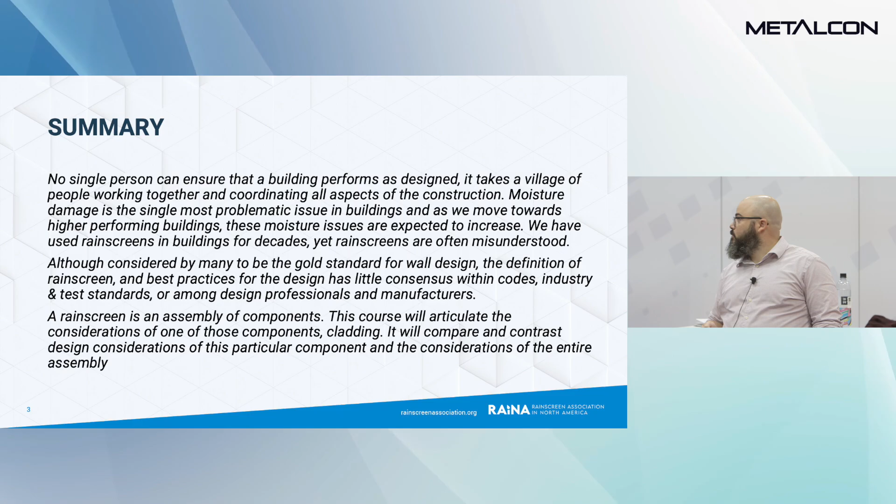So today we're going to talk about cladding and Rainscreen. Really what we're going to talk about is the source of the misnomer of people looking at a cladding system and saying, that's Rainscreen, or maybe looking at the wrong cladding system and saying that's Rainscreen. We're going to parse out between what's cladding, what's Rainscreen, and how they work together. So we're going to start with water management of walls - basic wall science, the types of walls, types of cladding, and then cladding integrated into Rainscreens, and then I'll give you my pitch on the Rainscreen Association.

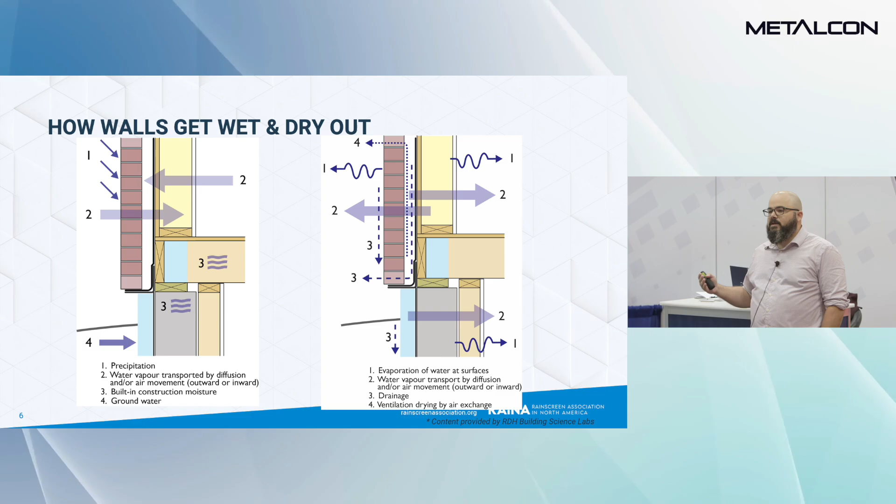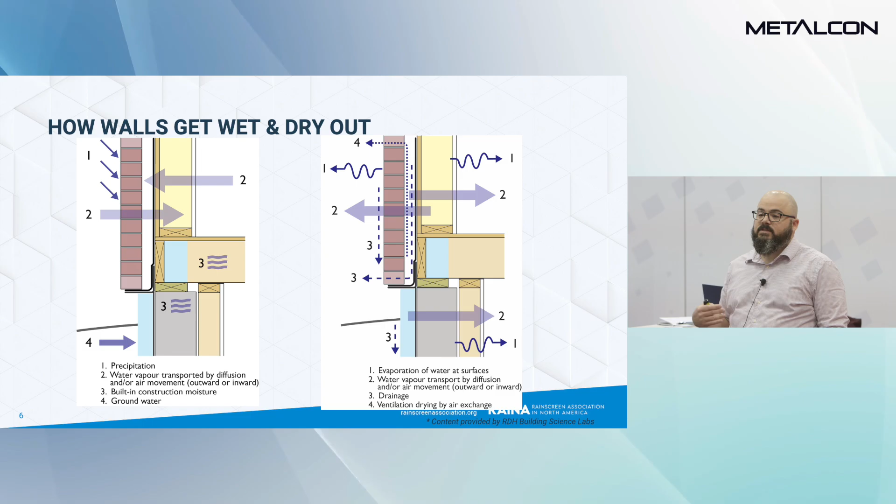So to start with, it starts with water, right? Walls are about protecting the inhabitants from the exterior, and there's a bunch of different ways that water gets into walls. If you have either designed your wall to take water, or maybe you've designed your wall not to take water and water gets inside, then you have to know how that water is going to get out of your wall system.

And what happens when you don't control the water in your wall system? You get problems, right? You might get leaks, obviously, and that can cause damage in a number of different ways. You see on that top picture, maybe that's freeze-thaw damage - I really don't know what it is, but you've seen freeze-thaw damage on things like stone and brick and other products.

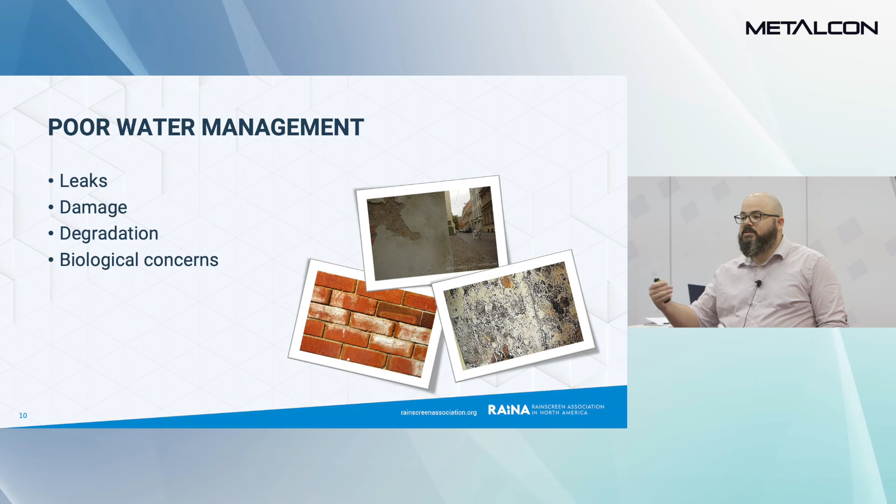And then you see the efflorescence on the brick on the lower left-hand side. That's when water goes into the wall system, maybe it doesn't have its route out and has to come back out through the brick. It carries with it the salts in the brick and deposits that on the face before it evaporates, right? And then hopefully not mold, right? Those are your biological concerns when you're starting to mismanage water.

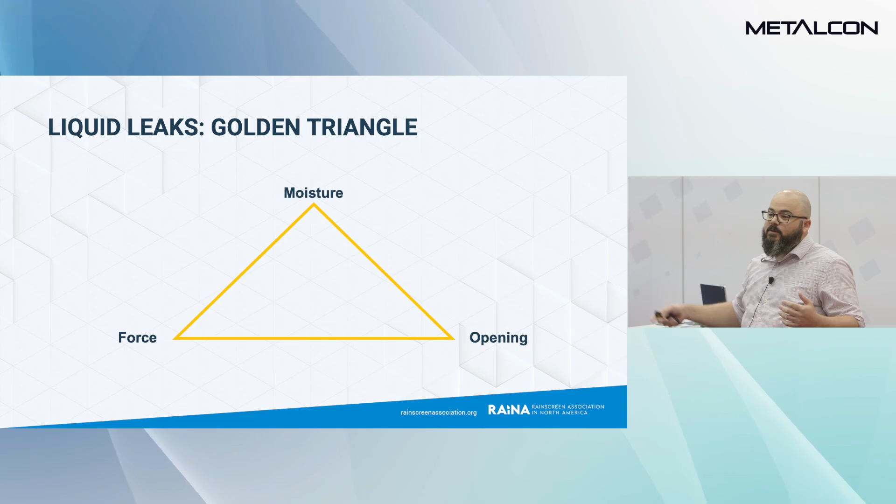So when it comes to liquid water, what does it take to get a leak? This is the golden triangle - this is what I've lived by for 20 years. If you have liquid water, which is moisture, an opening, and a force, all in the same place, you're going to get a leak. That's as simple as that, right? So if you can divorce any of those three, you avoid leaks. Great. Easy enough.

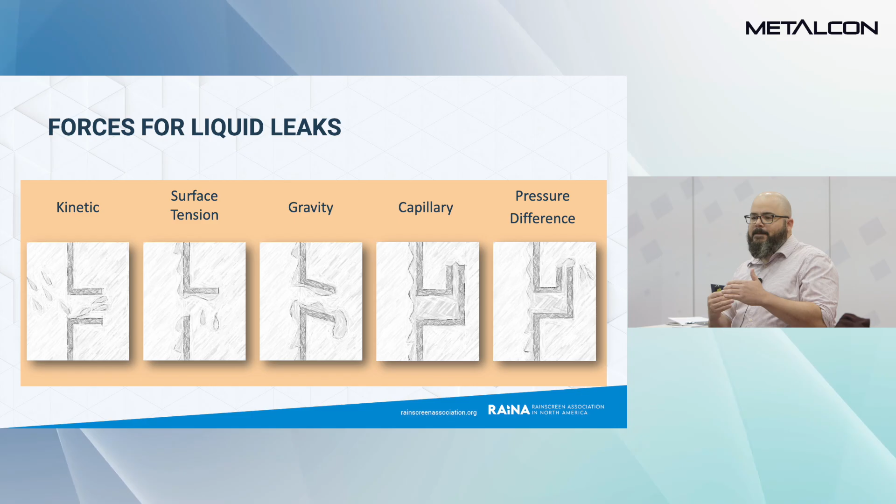The forces that create leaks are numerous. It's not just wind driving rain into your wall system—that's the kinetic force. You could also get surface tension forces where water sticks to a panel system that was damaged or misfabricated and goes somewhere it shouldn't. Gravity obviously pulls water to the lowest potential energy, whether that's your basement or a gutter. Capillary action lets water travel down or up through small spaces via surface tension. And pressure differentials, once water bridges a gap, will move that water one way or the other.

When you're designing walls, there are traditionally three major categories of water management strategies. Traditionally, and still in other parts of the world, you see a lot of mass walls—concrete, stone, brick, full-width walls. We call those storage walls because they can take up to 500 times more water than a stud wall system before they create a leak problem.

Traditionally, if you're in a temperate area like Europe building with a stone wall system, you're getting pretty quick wetting and drying cycles, and as long as those balance out, you're not getting water coming into your inhabited area.

Then you have the exclusion strategy, which is what we've done in cladding since the 50s and before. This is where you put all of your water barrier or water control layer on the outside of the building—sealed metal panels, stucco, EIFS, maybe even sealed concrete. You have to have a perfect barrier there to get perfect performance.

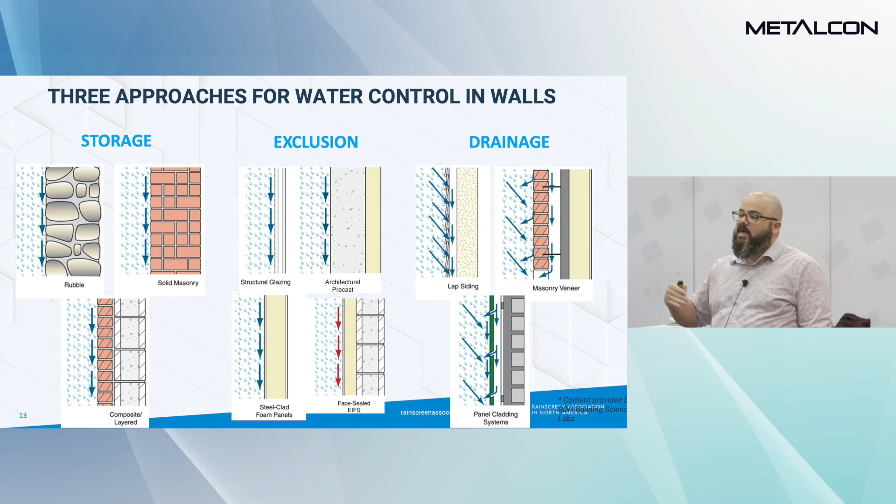Finally, what we're here mostly to talk about today are drainage walls. That's where Rainscreen fits in, but there's a much larger category called drainage walls, where you put a multi-layered wall system in. You're saying water can get through the first layer, so we take that load off our water control layer, which we tuck behind that first layer—that way we avoid leaks. Even if we have water problems we didn't anticipate on the front side, we're taking the load off the water control layer underneath it.

We used to have, even when I started, mostly just building paper and something in front of it. Obviously that's not working anymore. We want to make each part of the wall system the highest performance we can in terms of a functional wall system.

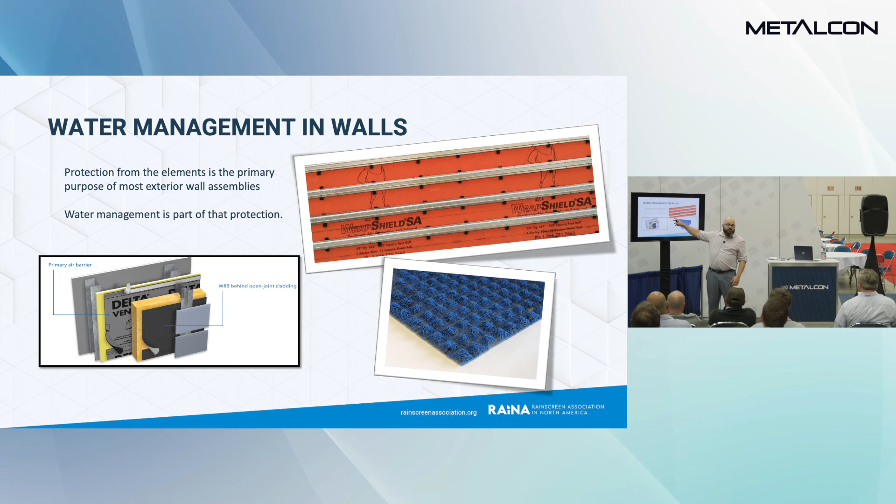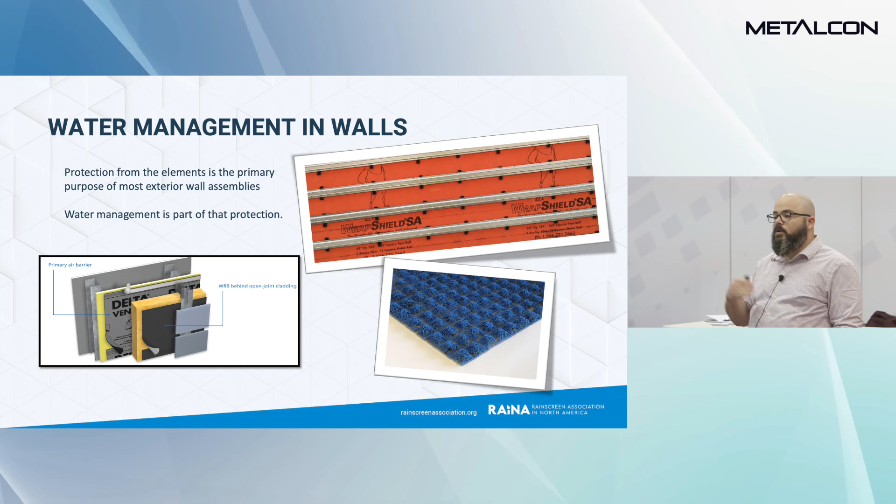So you're seeing these different water management products out there now—membrane products happening at multiple layers too. Against your sheathing you might get an air barrier and a water barrier, and then you might just have a water barrier that's not an air barrier in front of that, depending on how you're designing your wall system. You also have these dimple sheets to control and direct your water once it gets back into the wall system.

So we're thinking about different layers now. We go from that mass wall system, to exclusion where you could have one layer or multiple layers but are really keeping water on the outside, to the different layers of a drained wall system. What we have here is an example of that drained wall system and its different layers.

We're here to talk about exterior cladding. Behind that, you're creating an exterior cavity with an attachment system or some other way of furring that out. Then you have the exterior insulation underneath that, usually on top of your water-resistive barrier. Depending on where you are in the country, you may or may not be using exterior insulation still, but I guarantee you it's coming for you soon.

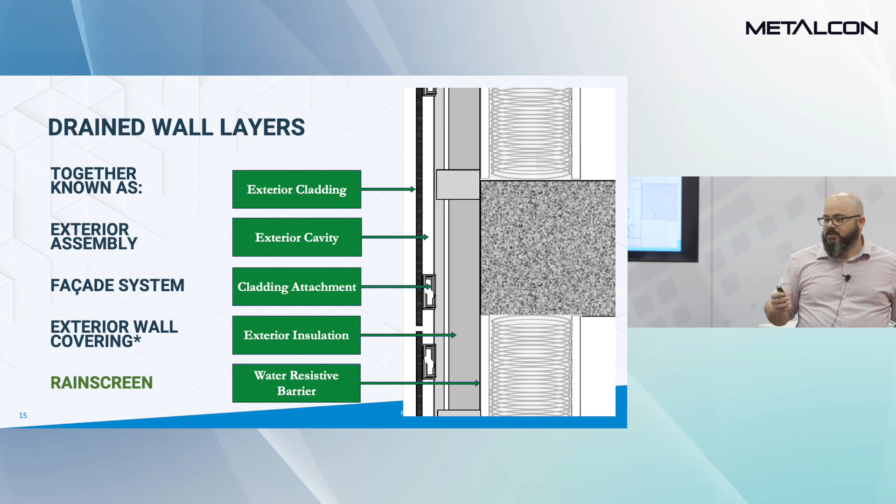So let's talk about that first layer—cladding. What makes cladding cladding? Merriam-Webster says cladding is something that covers or overlays, which is a pretty good definition—it sort of covers what we're talking about, but it's not good enough for us. So the Rainscreen Association did some research, going to about 10 or 20 different sources that talked about cladding the exterior.

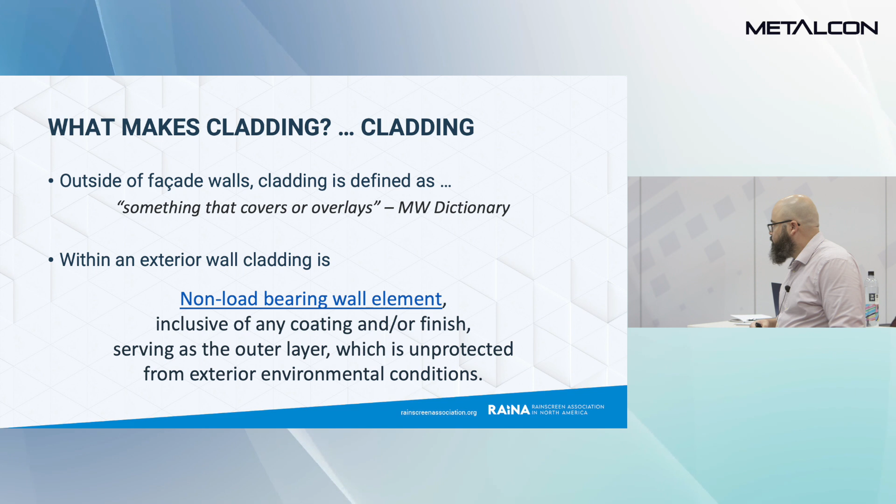They came up with a definition for cladding that covers what we're talking about today: a non-load-bearing wall element, inclusive of any coating or finish, serving as the outer layer, which is unprotected from exterior environmental conditions. That really covers most of what we call cladding in wall systems today. You see that non-load-bearing wall element is highlighted in blue.

That means that we have a definition for that too, because we started this definition saying we wanted to define cladding. Non-load-bearing is an essential part of these types of components, because as you get into code and compliance, the difference between load-bearing and non-load-bearing means a lot in terms of performance that you probably don't need on a cladding system. So what we found was that non-load-bearing is actually not a term that's been well defined.

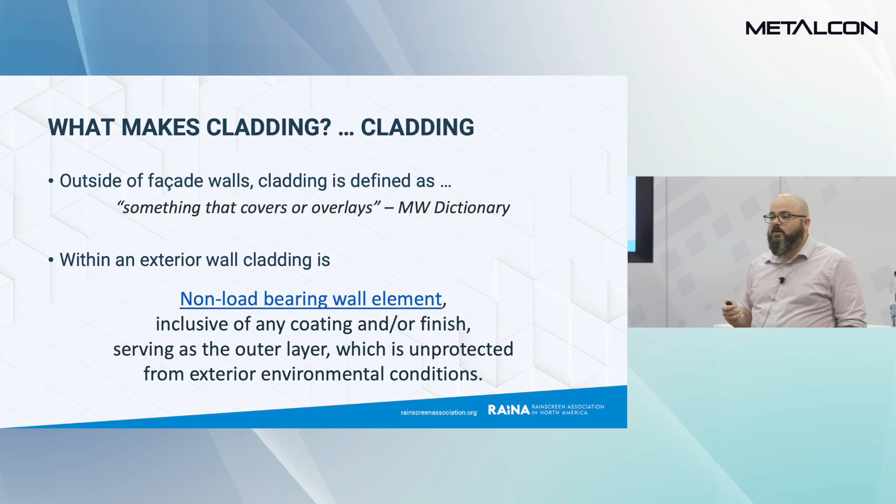It's not in the code. You have something that's called load-bearing in the code, but you don't have non-load-bearing. So we felt we had to define that as the Rainscreen Association, and we came up with this definition: it's a material or system that transfers load to the structure, does not contribute to the overall structural performance of the wall, and resists its own weight as well as loads imposed by surface-mounted accessories that are allowed by design.

That's non-load-bearing. I think it's probably the first definition you've seen of non-load-bearing. Whether or not you geek out on this stuff, I'm guessing I might be one of the few people here, but it's one of the only definitions out there for non-load-bearing, and it gives us an important distinction in those areas for compliance.

If you were at the presentation yesterday from Andrew Ashton, he was representing RAiNA also. He was the chair of the definitions committee, and they took months to come up with this with building scientists and representatives from AIA and the rest of the industry.

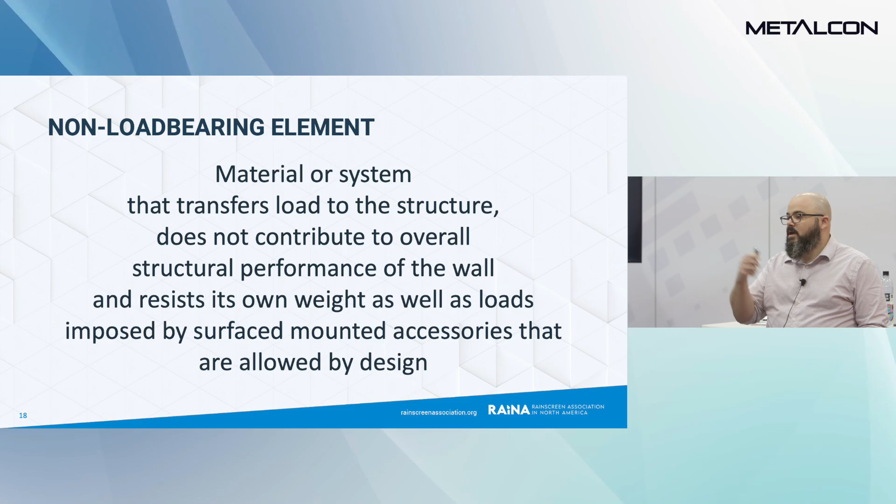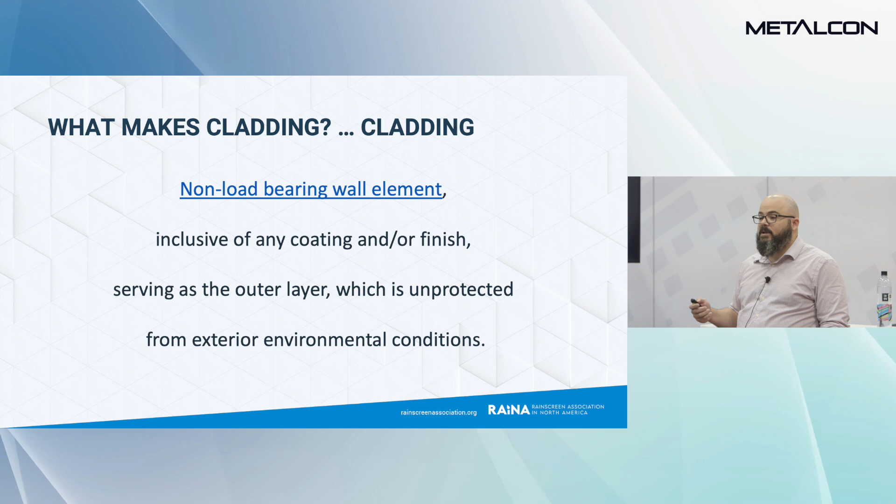So again, cladding is a non-load-bearing wall element inclusive of any coating or finish, serving as the outer layer, which is unprotected from exterior environmental conditions. Now we're going to revisit those wall systems with that in mind.

So you have a brick wall system, which, if you have a multi-wythe brick wall system, you're probably using that as your load-bearing wall. Right off the bat, that doesn't really qualify as cladding. It is your outer surface of your wall system, but it needs to do different things than cladding needs to do. So that's obviously your protective layer, but not considered cladding.

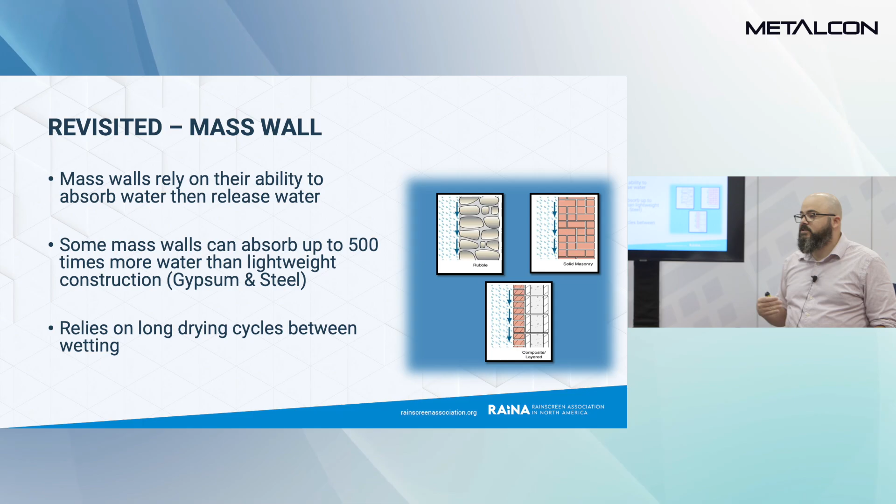You might have brick that is considered cladding, and we'll get into that after this. Actually, if you have a multi-layered system, a thin brick veneer on a concrete wall system, you still have that mass wall system, but now you have a brick cladding. That cladding doesn't necessarily need to have a standoff or ventilation behind it. You have that cladding component, non-load bearing, there for a different purpose.

For your barrier walls, now we're all familiar with sealed metal systems. So sealed panel systems are my typical reference for barrier walls. You have your panel layer, and then you have wet seals in the joints. And in that situation, you have cladding on most of these walls. You have a backup wall, and then you have cladding.

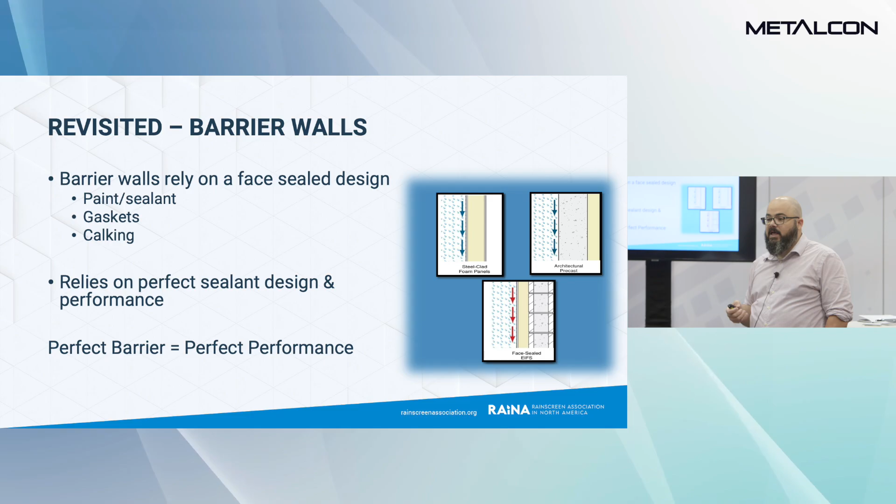Again, it's not necessarily a Rainscreen. It doesn't meet what we're going to talk about later on, but it's cladding. And it has its own requirements, probably very similar to cladding that is part of Rainscreen.

And then you have your drainage walls. Cladding in drainage walls starts to take on a bit of a different form. You're often using very similar materials in very similar ways, but then you get to introduce new materials because you have this drainage space that gives that outer wall some balance, where you couldn't use some materials in the same way you'd use a metal panel. Now you can start to use different materials.

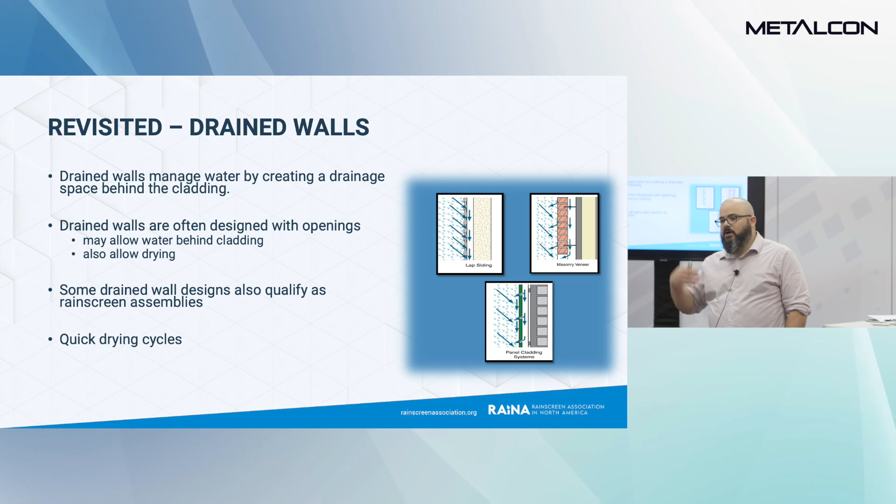Now, the types of cladding that are out there, I've just listed some up here, but you see a lot of metal. We're going to go through just about all of these in the next 15 minutes or so.

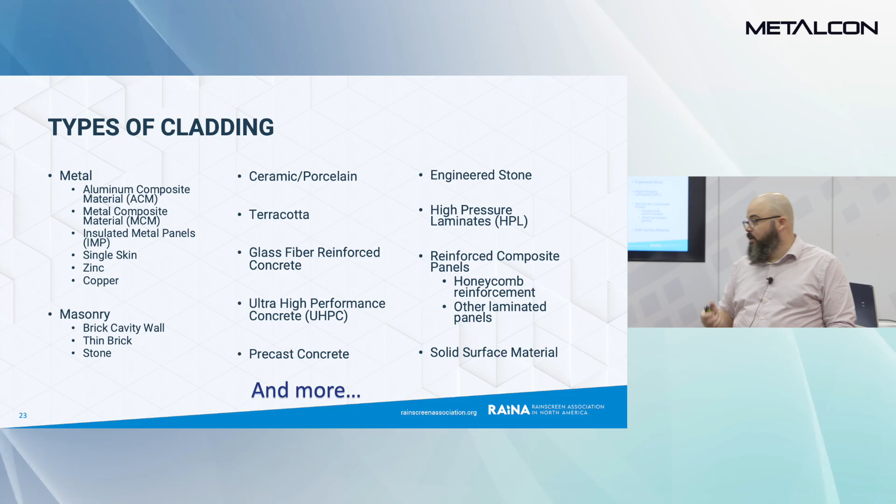But what's important here is that cladding isn't specific to a material. We can make just about any material into a cladding material, and it can be used in different ways, but you have to pay attention to the material properties. So we're going to start with metal.

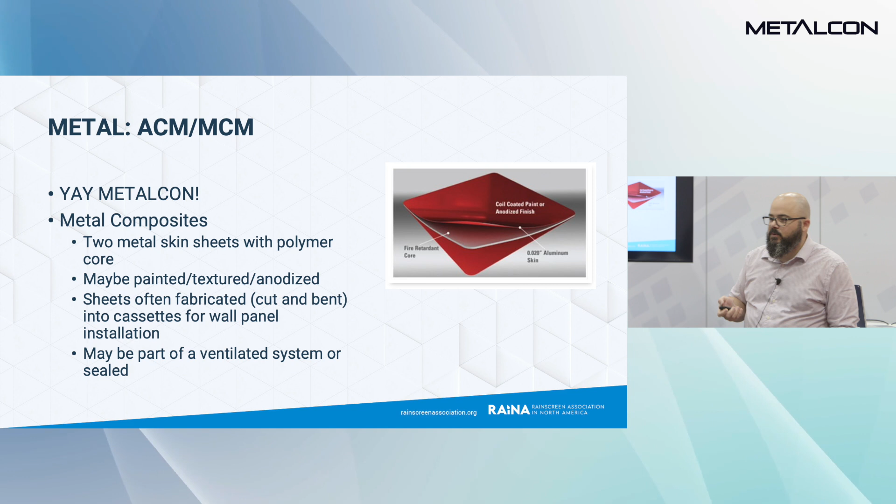Yay, MetalCon! ACM, MCM, I'm assuming this is what most of you guys are dealing with. This is a metal skin product that has some sort of polymer core, usually FR, and we fabricate it into cassettes. I've seen metal ACM used the same way that other, let's say, more rigid claddings are used, where you don't fabricate it into cassettes, but for the most part, you're doing a cassette system, fit into each other, with either dry or wet joints.

From an aesthetic standpoint, this is what you're getting with ACM. Obviously, we're seeing a lot more—if you've been to AIA in the past couple of years, you see incredible geometric designs happening with ACM systems. I don't know how often you guys are doing those in your own shop, but they're pretty impressive for showpieces.

Then you get into single skin metal. With ACM, you have that polymer core, so you don't necessarily have a non-combustible product, and then you have compliance considerations that you have to consider on top of that.

With single skin metal, that's just whatever type of metal you're dealing with, maybe painted or sealed, being fabricated into cassettes or just panels attached, maybe even in exposed fastening systems. The benefit of single skin is that it's often fairly easy to fabricate, and it's non-combustible.

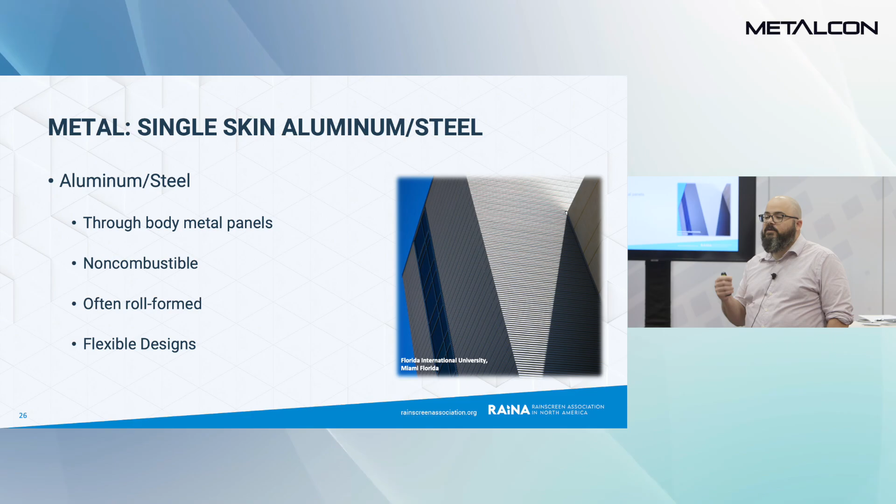Where I live in New York City, they just passed very restrictive building code language that limits combustible products pretty severely. Single skin products are one of the few products that fit nicely into the new code.

Then you get into other metals - you have zinc, copper. I've heard of titanium, never seen a titanium product, but heard of it. You're pretty much treating those similar to single skin, except they might have their own needs in terms of design and fabrication.

Sticking with metal, you have your insulated metal products. These are insulation that's skinned over on both sides by either steel or aluminum, and that insulation is most typically foam, but can also be mineral wool.

What's interesting about insulated metal panels is that they're intended to be insulating. So with the other metal panels, you can seal them or might not seal them, but you're typically sealing the insulated metal panels to get that insulation value.

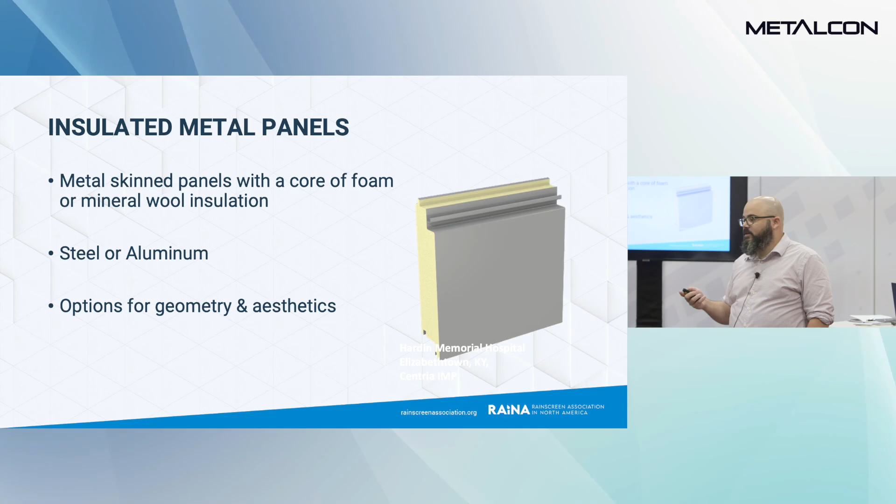However, I've seen a couple projects where they're using one of the other characteristics of these panels in a ventilated facade, which is an interesting choice from my perspective, but is happening out there. One of those benefits is the long spans you can get - you can put up 20-foot panels and keep them pretty rigid with insulated metal panels.

How many of you deal with insulated metal panels? Okay, good.

Now we're getting out of the metal side of stuff. If you want to leave, feel free, I won't be offended. You start to get into things like traditional masonry, so you have those brick systems - brick as a traditional load-bearing wall system, and then brick as a cladding material.

We're talking about brick as a cladding material, and this is a single width brick. Traditionally, you're putting on a lintel and stacking it up, but these days we're doing all sorts of different things with brick. You've even seen thin brick systems that go up like a panel - put on a metal piece and then put up like a panel on a wall system.

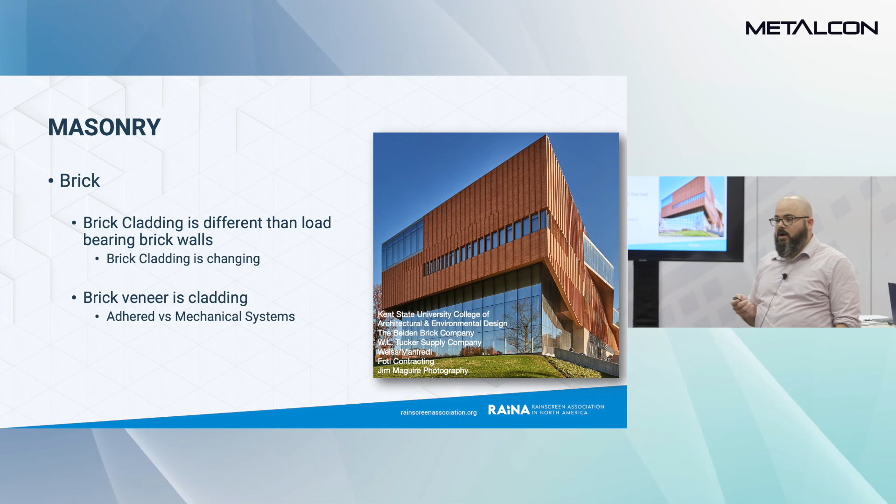One of the benefits of brick, again, it's non-combustible, so you get that benefit again in New York. Brick is one of those few products that we can easily fit into the new code.

Stone cladding is the same thing. We're seeing tremendous changes in stone cladding. One of the products that I helped introduce into the market bordered the masonry side of the business.

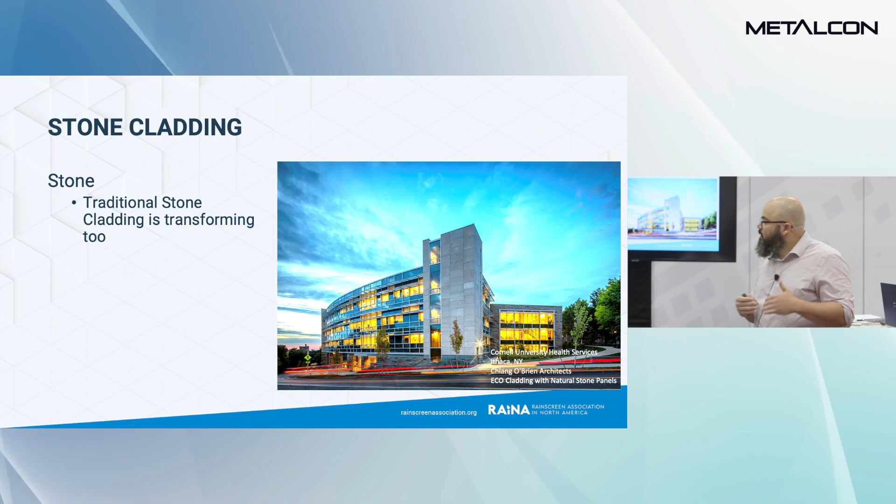When I was doing that, the masons were essentially focused on stone and brick and those sort of products. They wouldn't touch anything else. They operated different than panel installers - they were familiar with the traditional way of stacking stone up and attaching it to the wall that way. Not exactly like brick, but a similar mindset to a brick wall system.

Today, you're seeing all sorts of ways that stone's going up. You could put stone up in exactly the same way you're putting metal up, just using some different fasteners and doing a little bit of different site testing. But we're seeing all sorts of ways that natural stone is being used, very similar to any other cladding material, and again, non-combustible. Then you have your ceramics and porcelains, which are exploding onto the scene.

Traditionally, if you were going to build with ceramics, you'd have very small ceramic pieces with plunge cuts in the side, and you would stack them up. You might put them on a traditional rainscreen system where it's standing off the wall, but you would still stack them on top of each other.

Now we're seeing 5-foot by 10-foot porcelain panels in thin gauges, highly engineered, highly designed to go up like you would other panel systems.

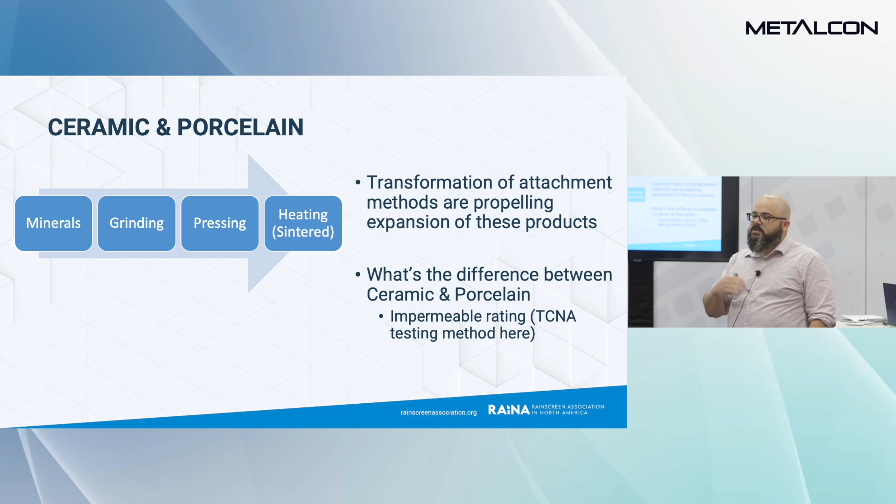The difference here is most of the products - if you have a CNC that you're cutting metal on, you might be able to cut something like the two, we're going to talk about fiber cement and HPL on those. As you get into these masonry products and porcelain, you're talking about a totally different setup and wet cutting. The companies that bridge those gaps are few and far between, but that's growing as these segments grow.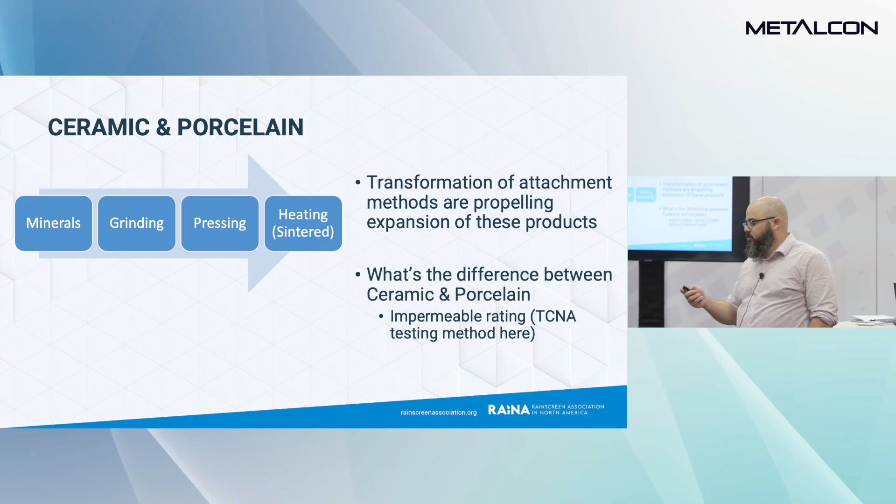Porcelain aesthetics give you very flat panels, larger panels, typically natural tones. But the technology with porcelain is increasing, and you can even get custom printed images on porcelain panels.

Then you have terracotta. How many of you actually install or deal with other products besides metal on wall systems? Okay, a few of you.

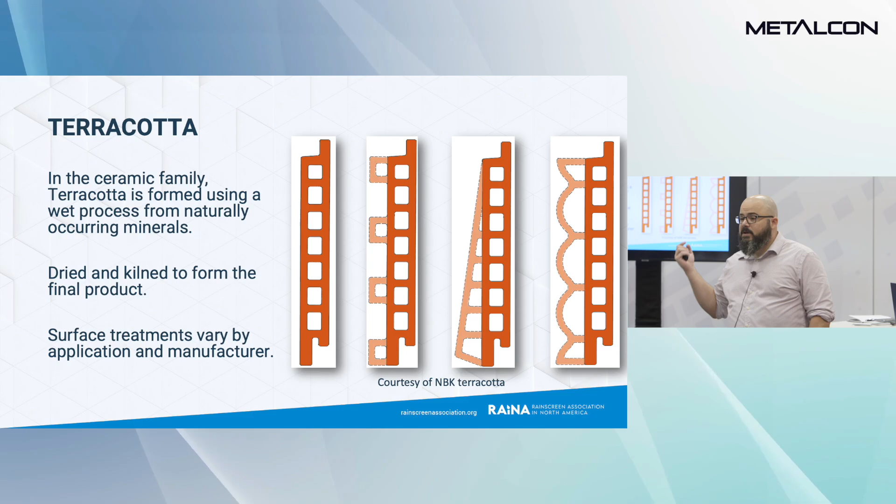Terracotta is obviously thousands of years old, and we're still making it - not in the same way, but in similar ways. It's a traditional building material you see on the oldest buildings in New York City and around the country, and now we're putting them in highly engineered rainscreen systems. Often you're seeing terracotta in standard heights, extruded. It's a wet process, sort of fits into the ceramic family, but has different qualities than ceramic.

With terracotta, you get a lot of flexibility, but you're often limited to whatever that extrusion die is. From an aesthetic standpoint, you see those standard heights. The architects are typically happy to design with those, not having to think about where all the joints lay - those are controlled for them.

Then you have fiber cement. Fiber cement is a cementitious product - we're going to get into a few of these. Fiber cement is water, sand, cement, fiber, and air. Those fibers can be organic fibers, cellulose fibers, or glass fibers, whatever - they help hold the material together. And then they're either air cured or autoclave cured.

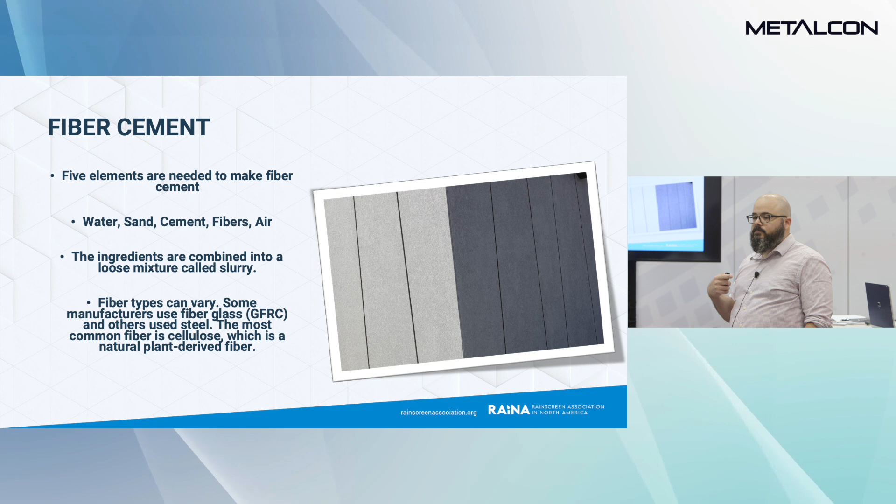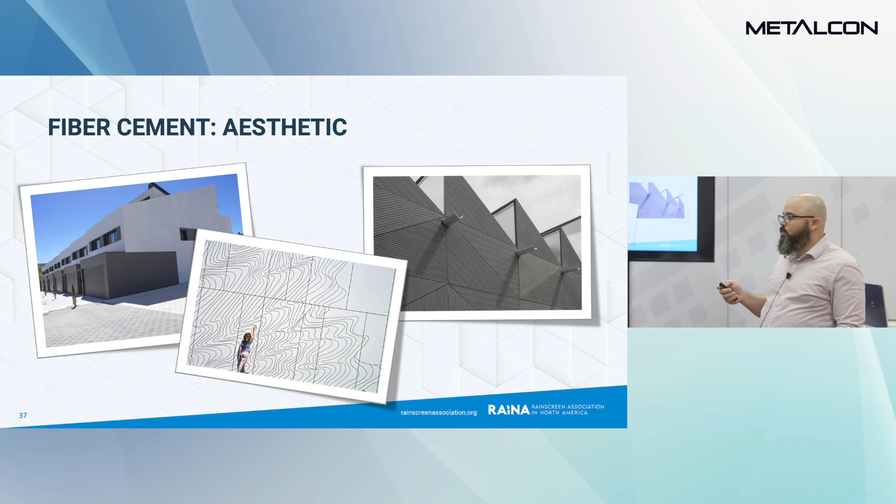Fiber cement, similar to porcelain products, typically gets those natural colors, but you can get a lot of texture in fiber cement that you might not be able to get with other products. They're also going up in large size panels, custom made. A lot of your metal equipment can actually cut fiber cement panels, and we're starting to see some traditional metal fabricators switch over to or add fiber cement to their products.

GFRC is another cementitious product, similar makeup but a little different, using glass fibers, typically non-combustible. Fiber cement can be combustible or non-combustible depending on the manufacturer's product. GFRC is typically non-combustible, and it's also usually put up in thicker, more customized designs.

Ultra high performance concrete - has everyone heard of it? Okay, so these are again in the cement family. They might have fibers in them like the other products, but they're often a denser product, often thicker, and put up in large panel formats. From an installation standpoint, most installers won't really know the difference between installing these three different products, except for the weight as they're installing it.

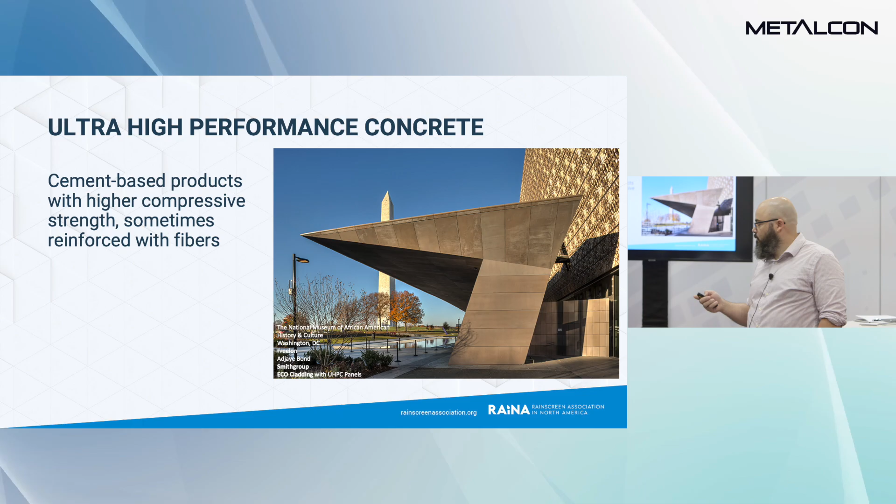Then you have precast, and precast is interesting because it's been used as that mass wall system in the past, but we're also seeing precast go into cladding now - going on top of a wall system. Sometimes that's for schedule and installation reasons, but we're seeing precast as cladding in this industry more and more.

Then you have high pressure laminates. Who's dealt with high pressure laminates? Good, great. High pressure laminates are a combination of wood fiber and phenolic resin - they press those at high heat and high pressure, and come up with this monolithic panel that's very flexible, and you can put any designs into it.

They're putting a paint layer on top of it. But you have to deal with the fact that it's wood and phenolic resin, and make sure you're complying with fire codes. So you have a lot of flexibility there, pretty easy to handle, pretty easy to fabricate, and then you have your compliance issues on top of it.

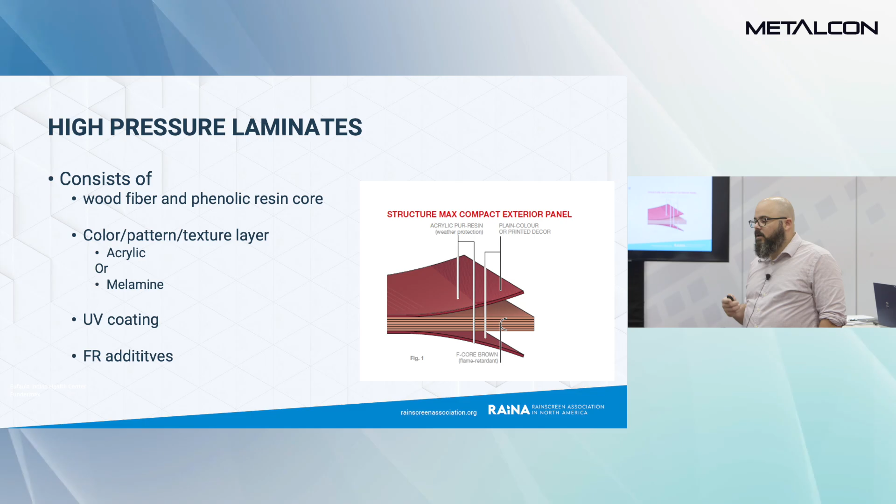Again, you're doing large formats, customized cuts, similar to a metal panel layout. The architect is drawing the lines wherever they want, and you're cutting it to those specifications, designing it.

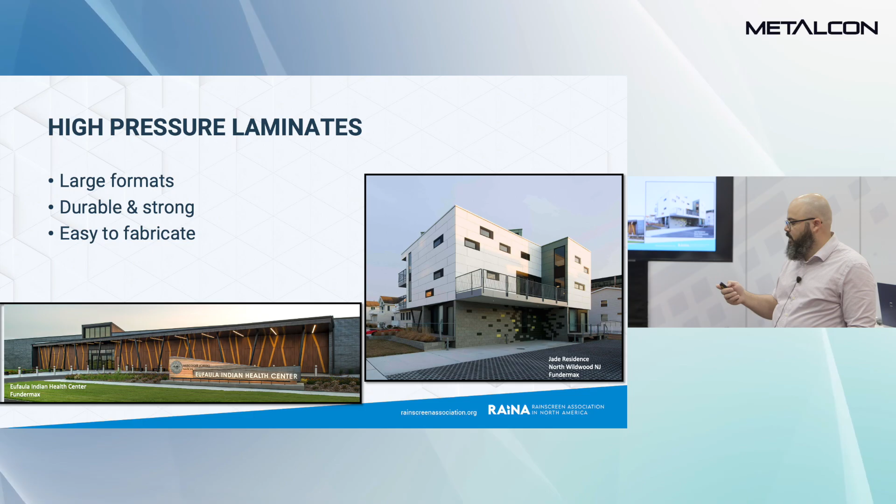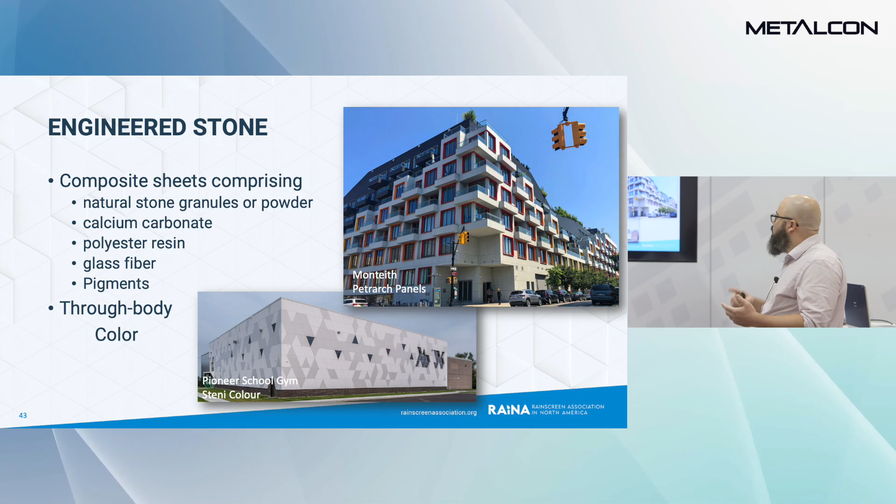Then you have engineered stone. Engineered stone is natural stone, calcium carbonate, a resin to bind it all together, usually some sort of fibers to reinforce it, typically about half an inch to an inch thick, put up similar to other systems. Engineered stone is one of those products that has to be balanced, so you're typically putting it up in a ventilated facade.

Now, a lot of these products can be sealed. They can be put up depending on what the product needs are. For example, HPL has wood in it, so it needs to be balanced on both sides because that wood is going to absorb humidity just like any other wood. So it's not going to be sealed to a wall system, but a lot of these products can be tiled onto a wall system or put into a rainscreen system.

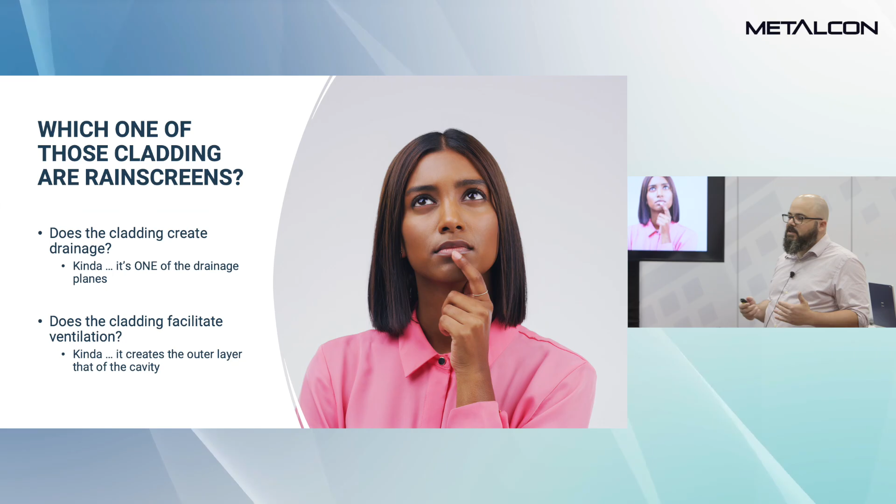So which one of these products is a rainscreen? I think I've given you that answer already and enough information to say that none of these are rainscreens. They are all products that go into rainscreens. Does anybody have a question on that? Because we need to address that right now if that's okay.

So how do we get to a rainscreen? We're going to go back to the wall system. As we think about wall systems, we have those mass walls, those exclusion systems, and those drainage systems.

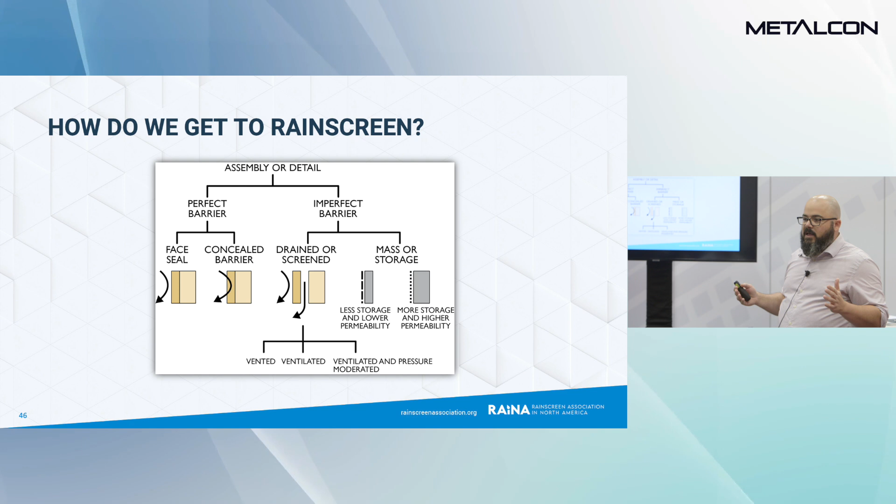We're going to break those into what you need a perfect barrier for and an imperfect barrier, and I know using the word imperfect is not great marketing, but it's a good way to think about this. With sealed systems, whether you're putting a sealant on concrete or sealing metal, you want to make sure you're creating a perfect barrier. It has to perform perfectly, and you're maintaining it so joints don't dry out or crack in the sealant, so that when water gets into your wall system and has no way out, it's not causing problems. With an imperfect barrier, you're allowing water to travel behind that cladding, and that can be a number of different assemblies.

So again, with that mindset of what is rainscreen, we're laying out a progression of wall systems going from face sealed all the way to a pressure moderated rainscreen. You see this blue line in the middle is where we define this is a rainscreen, this is not a rainscreen. This doesn't mean one is better or worse - that's not what we're talking about here. We're talking about how different projects have different needs. You might be designing a face sealed system on certain projects because that's the need on that project.

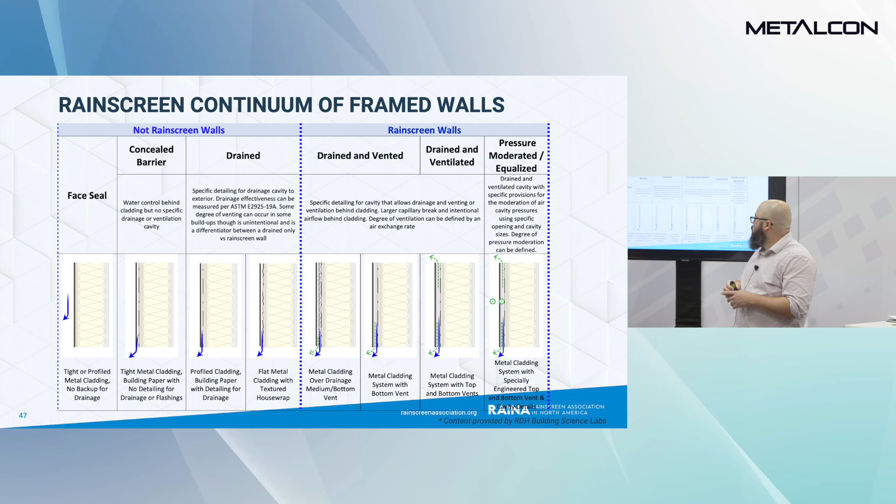Then you go to concealed barrier and drained wall systems. These systems just before the blue line do have a drainage plane in them, but they're not going to have enough of a plane to allow for ventilation - just drainage behind the cladding.

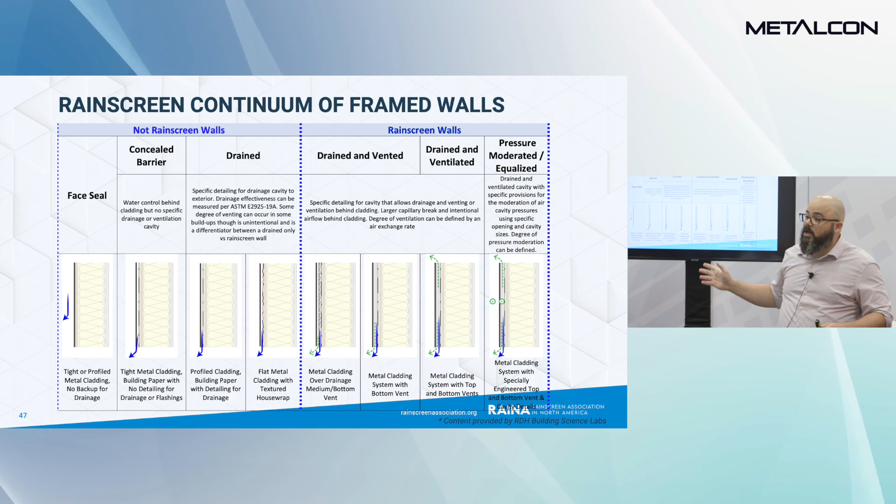As you go beyond that blue line, you get into rainscreen. That's where you get ventilation and drainage behind your cladding system to allow the rainscreen principle to work. So you start with a drained and vented wall, then move to a drained and ventilated wall, then move to a more sophisticated, more complicated pressure moderated or pressure equalized wall.

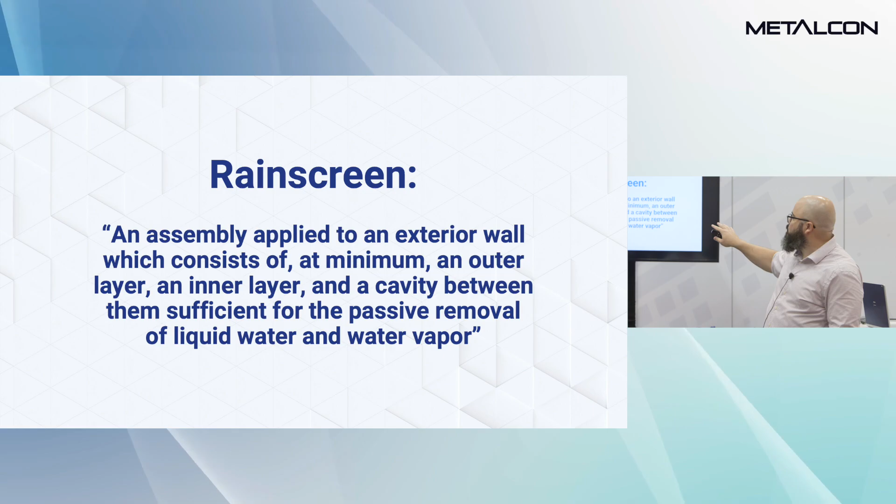So the Rainscreen Association defined rainscreen as, obviously, their first task as the Rainscreen Association. There were a lot of different interpretations of rainscreen, including just how you spell it, whether it's one word or two. Essentially, it came down to an assembly applied to an exterior wall, which consists of at minimum an outer layer, an inner layer, and a cavity between them sufficient for the passive removal of liquid water and water vapor. So it's a pretty wide definition.

It allows you one layer, a cavity, another layer, and that cavity has to be able to do two things. That's it - then you have a rainscreen, great. Everything else is up to the design of your wall system - what does your building need beyond that?

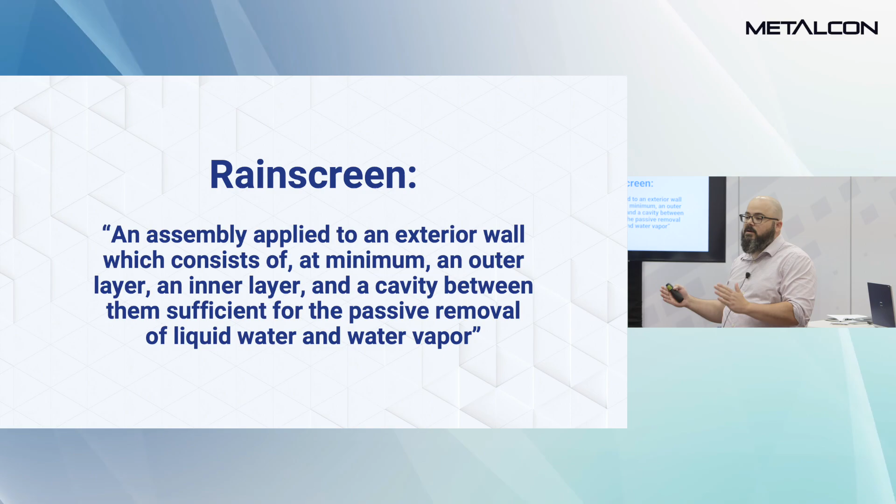So let's give a visual there. Number one is your cladding, your outer layer. Number two is that cavity, created by the outer layer and the inner layer. Number three is that inner layer, and then you have your ventilation and/or removal of water vapor and liquid water.

So as we start to talk about the components in a rainscreen, and we talked about all those cladding materials, it means that almost any cladding and any backup wall separated by a cavity that is drained and vented or ventilated qualifies as a rainscreen. Congratulations, you have a rainscreen.

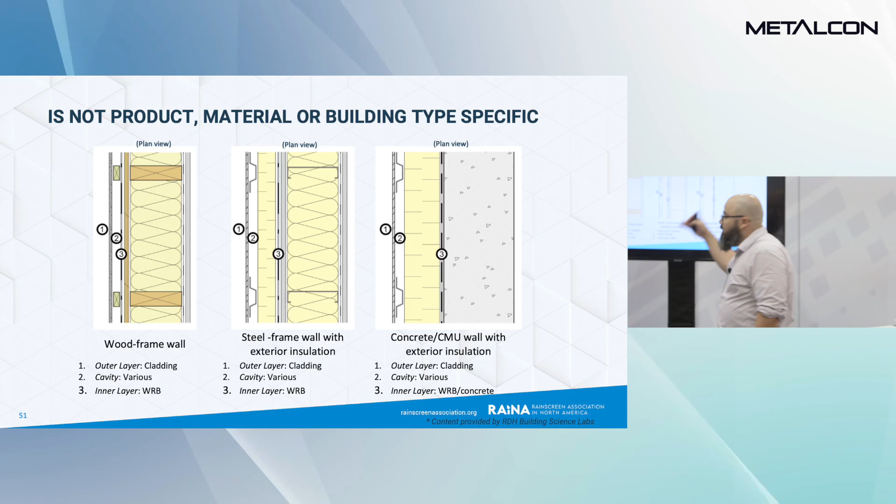However, it's not a product, right? So none of these materials in the wall system are rainscreens. They all contribute to a rainscreen when they work together.

And for the residential side, and the Rainscreen Association has a strong residential committee, you have products that create that space for ventilation and drainage, those dimple mats and so on, and give you those rainscreen principles, but they have to be in, again, a rainscreen assembly.

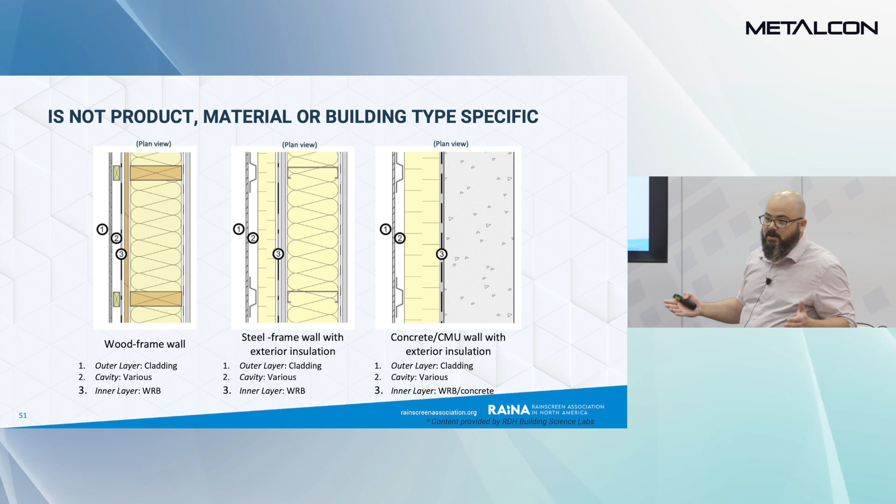Again, I'm boring you with this definition, but it's important to note that there's different parts of it. We worked on this for 6 months at the Rainscreen Association, so I'm proud of every word in this definition.

But 'at minimum' is a key part of this rain screen definition. You could have those two layers and that cavity and have a rain screen, but it might not be acceptable for your wall system. If you just have those two layers and a cavity, it's probably not acceptable. You need more thought in that design.

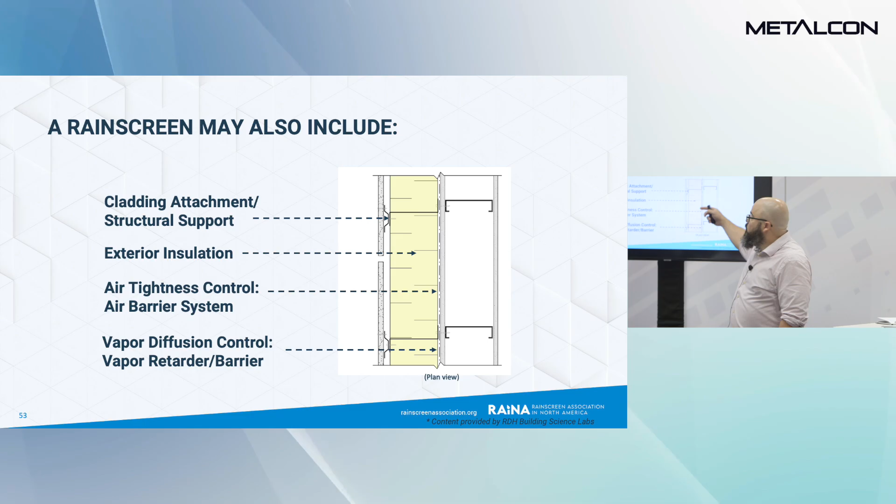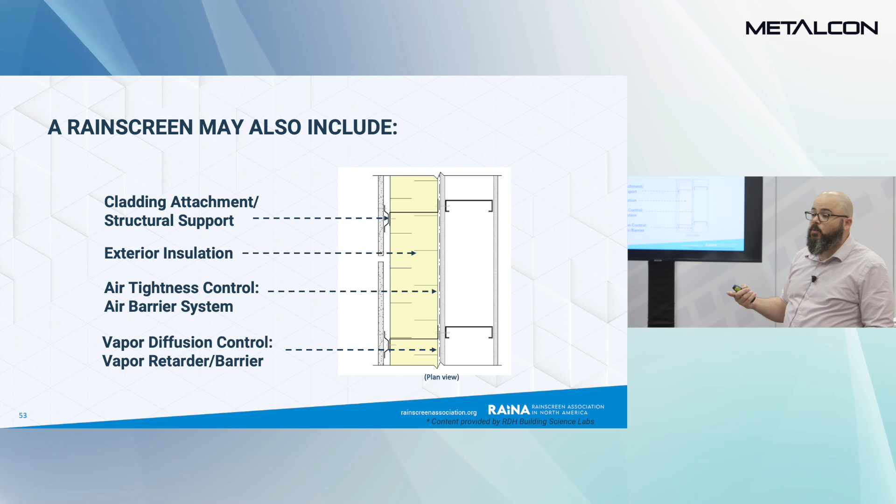So there's other things that make up a rain screen in terms of designing high-performance rain screens. You have your cladding attachment structural support, your exterior insulation. You might have not only a water-resistant barrier but an air barrier in there, depending on where you want that air control to be. And then your vapor diffusion - that might be your air barrier, or it might be a different place in your wall system, again based on the design of your wall.

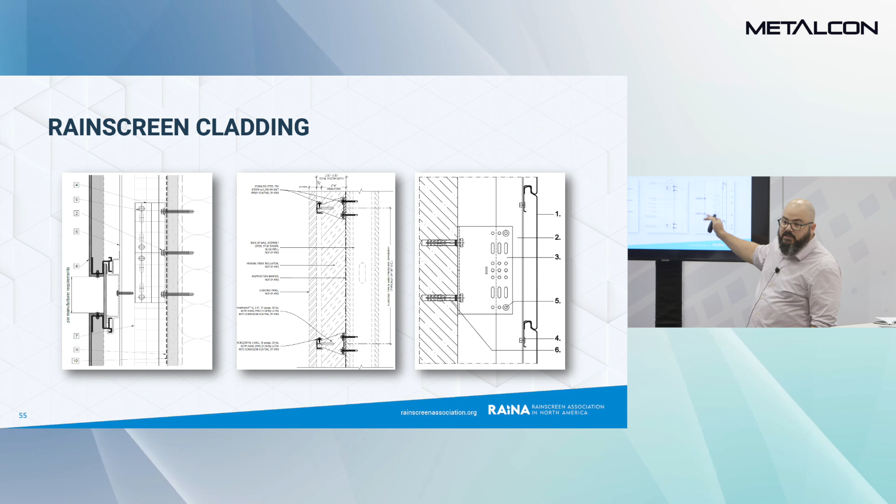Every component in there has a role, and they all need to work together - they have an individual role, and they also all need to work together. Here's some section details of different rain screens. They might have different claddings on them, different attachment supports, some you don't even see insulation on, but they all are rain screens.

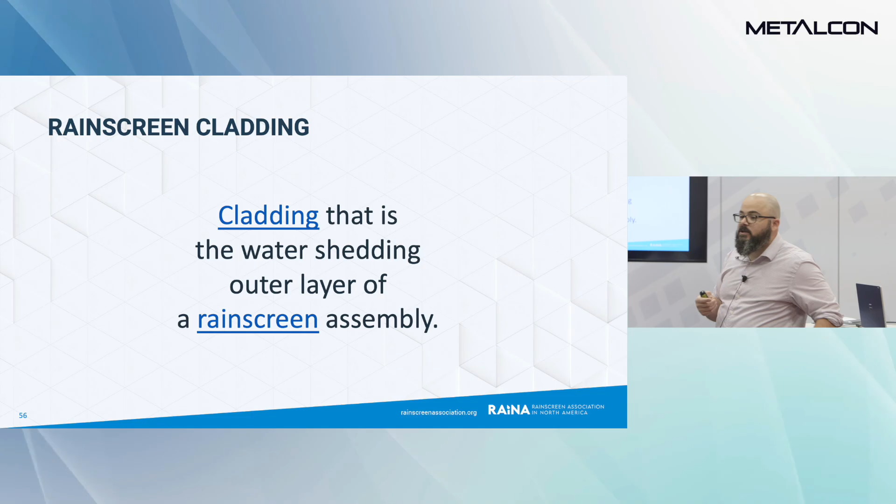So what's a rain screen cladding? I'm a little ashamed to say the Rainscreen Association spent a couple meetings on this before they were like, oh yeah, it's a cladding that's using a rain screen. That's the definition. But it's important that it's water shedding - you want to make sure you're reducing the load on that water control layer, which is typically deeper in your wall system.

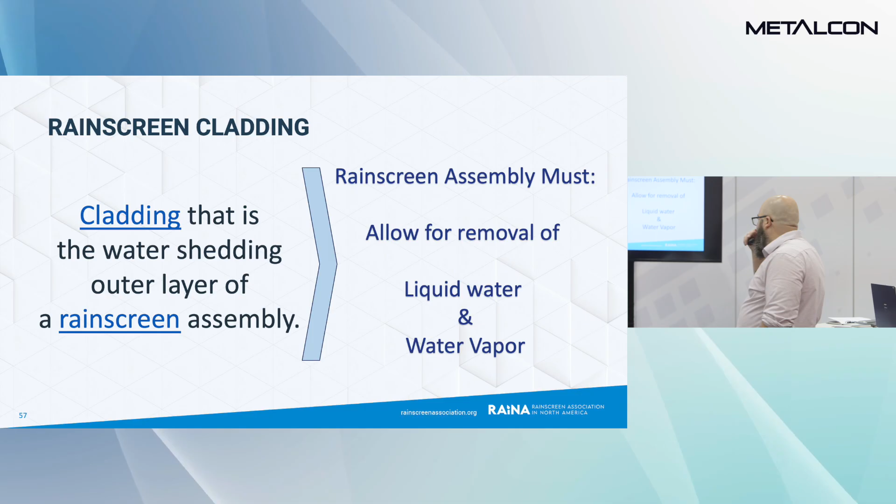So beyond water shedding, it needs to be put up in an assembly that allows for liquid water removal and water vapor removal.

As you talk about integrating claddings into rain screen, there's also a lot of other considerations. You have the design of that cladding. For a metal system, you might be putting together a cassette system where you don't have any visibility to whatever's behind the cladding, so it interlocks - it may be wet or dry, it doesn't matter, but it interlocks and you're not seeing behind that cladding. For a lot of other materials, you're putting an open joint in there.

So you might see the insulation behind it, the water resistant barrier behind it. You might have to mitigate that for a few reasons - one's aesthetic, our architects don't like to see through that joint and see whatever's behind it. Another reason might be the UV durability of whatever's behind it.

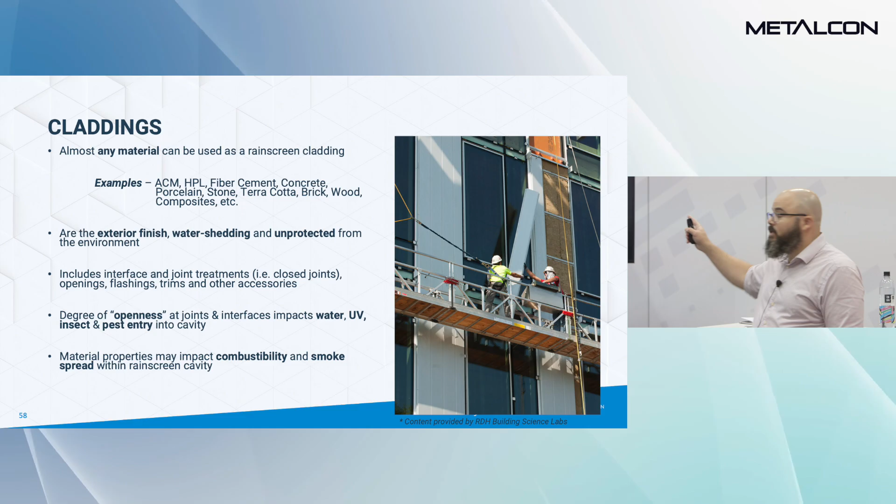So the openness of joints, the joint design - again we get to fire considerations. This is a big thing. I've been involved in what's going on in New York City for 18 months, and that's all about the fire consideration of your wall assembly, depending on what you're using - not just the cladding, but the components behind it. So if you have a cavity that's different than what's tested, that cavity might be larger or smaller than what's tested. That means we have to think about what that fire performance is - does it qualify for whatever was tested before?

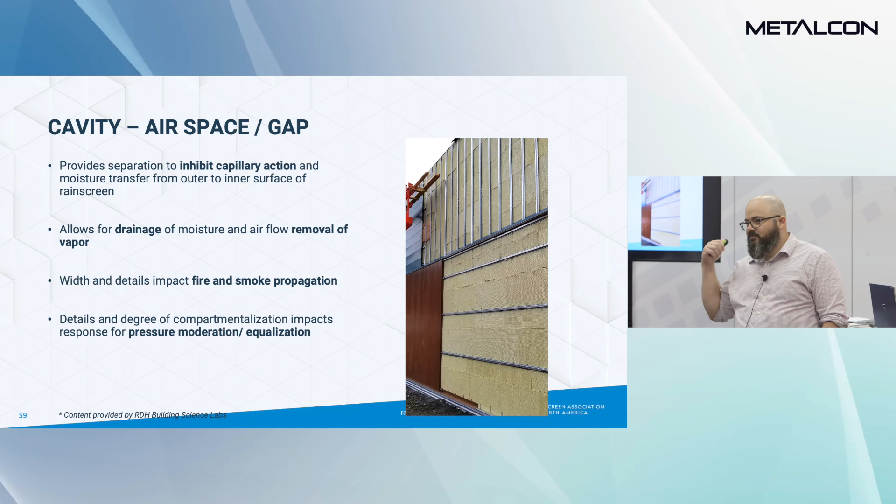Again, cavity - we've hit it over and over again. Drainage, ventilation. Difference between venting and ventilation. A lot of metal systems out there, especially pressure equalized systems...

They'll use a technique, and this is not indicative of a metal detail - this is a typical rigid cladding material. But a lot of metal systems and systems that don't need to be fully balanced can use a vented technique where you actually put that vent space in the bottom of the panel, close off the other three sides, allow for water that gets in there to get out, allow for some exchange of airflow, but not full airflow in terms of ventilation. To have ventilation, you need to make sure at the top and bottom of wherever you're putting your horizontal flashing is fully open, and that your cavity is fully open.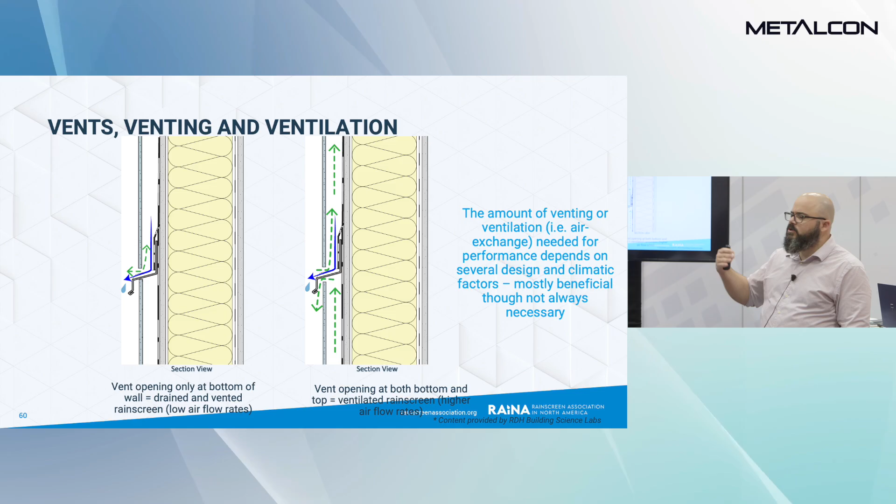So if you have horizontal supports, you need to make sure that they're either perforated or that you have something behind or in front of that horizontal support to make sure that you have a continuous vertical cavity for ventilation.

So to design that cavity, and also for a lot of other design considerations like thermal performance and sometimes fire performance, you see a lot of cladding attachment systems out there. By last count, there's about 25 companies in the US that just offer cladding attachment systems, and they all have their own little niche.

Traditionally, when we're looking for high performance systems, we were going with aluminum claddings, like a T&L type system where you have a wall clip and then some sort of rail on top of that. You have a lot of iterations of that. Out of those 25 companies, I'd say 15 to 20 are primarily selling that.

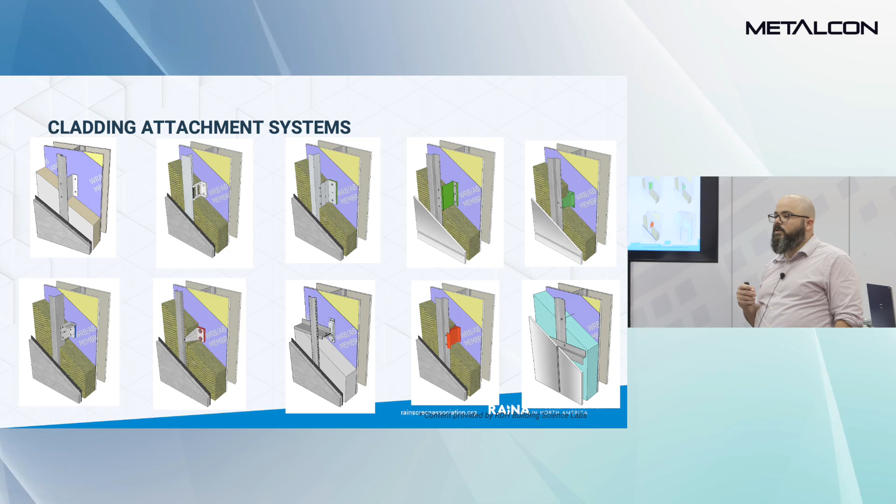But then you have other materials. You're seeing materials like stainless steel, which has very high thermal value and is non-combustible, and companies are coming out with those sort of options. You're also seeing FRP options, which are non-metal options for thermal performance, but then you get into compliance issues for things like fire and making sure that you still meet the code.

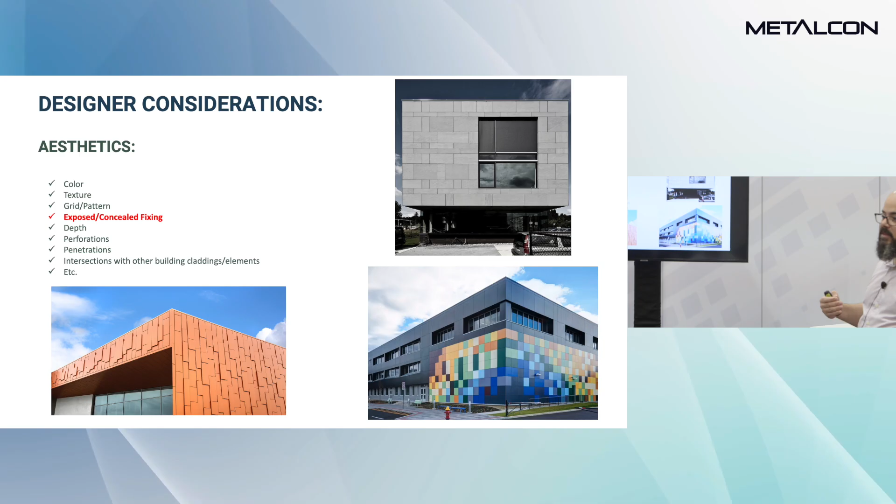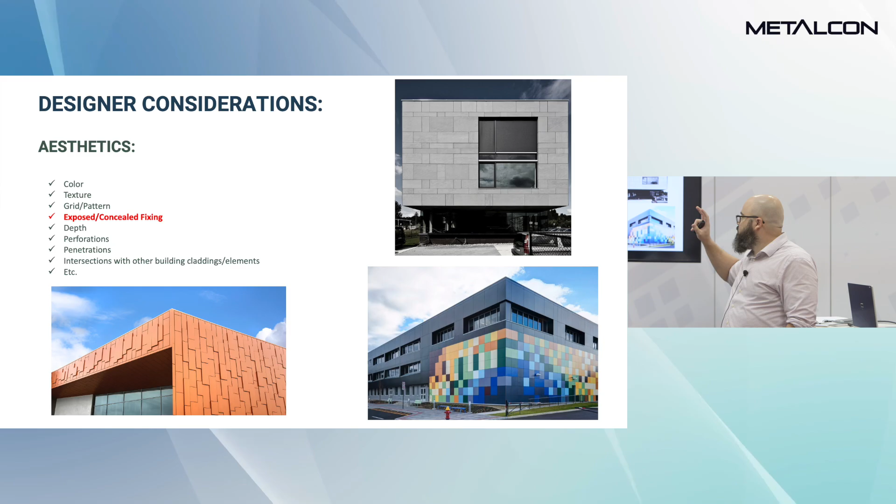There's a lot of people that are also involved in Rainscreen design. So designer considerations are all of the technical things we just talked about, and the aesthetics of the wall system. Because they want to make sure that they're designing an aesthetically pleasing wall, something that's going to have their name on it. And so things that we don't think about, and sometimes on our side of the industry are kind of a pain.

Designers are thinking about how they can use this material differently to make something that's unique, but still maintain all of those technical performance requirements that we want.

For those considerations in terms of technical performance, it often gets down to what the manufacturer is saying, but is also backed up by a lot of testing. And so this is where you get into certifications and testing for different materials. For the most part, most of these tests are material tests. There's only a couple of system tests out there for Rainscreens, but most of the tests are: you're going to use this material at this point, test it for its material properties. You're going to use this material behind it, test that for its material properties.

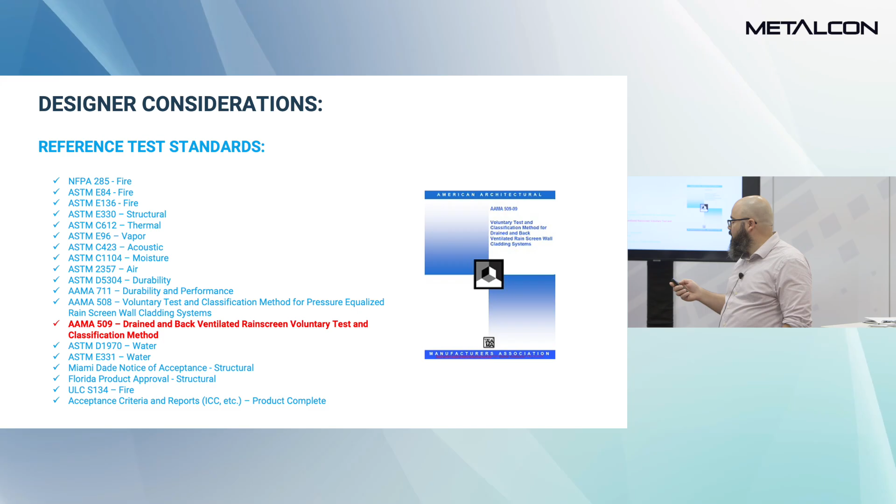Who knows if they work together well? But the material properties pass the smell test. The Rainscreen Association is focusing on that idea - that we need to start integrating this thought process. AAMA or FGIA has two standards that do incorporate the whole system: AAMA 508 and 509, which evaluate the performance of the Rainscreen in terms of water. And then we have NFPA 285 and S134, which evaluate a whole system in terms of fire. So it's not just a component of the system.

And then as a contractor installer, you also have a lot of considerations, because you could have a designer that is designing a system behind your Rainscreen that's not appropriate for the material that you're putting in cladding. So if you have, let's say, very long metal spans without a break, and you have something like fiber cement or porcelain that's not going to have the same thermal expansion and contraction as that metal, you're setting yourself up for major problems down the road, because that metal is going to want to move, and the material in front of it's not going to want to move.

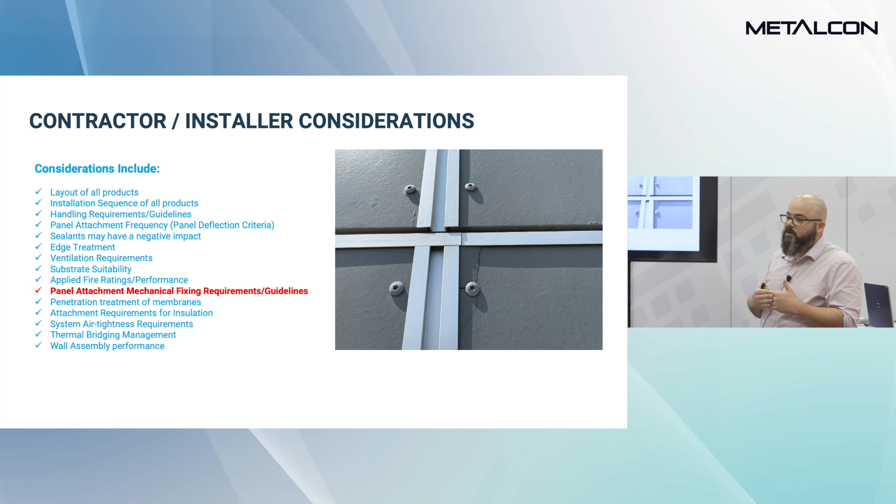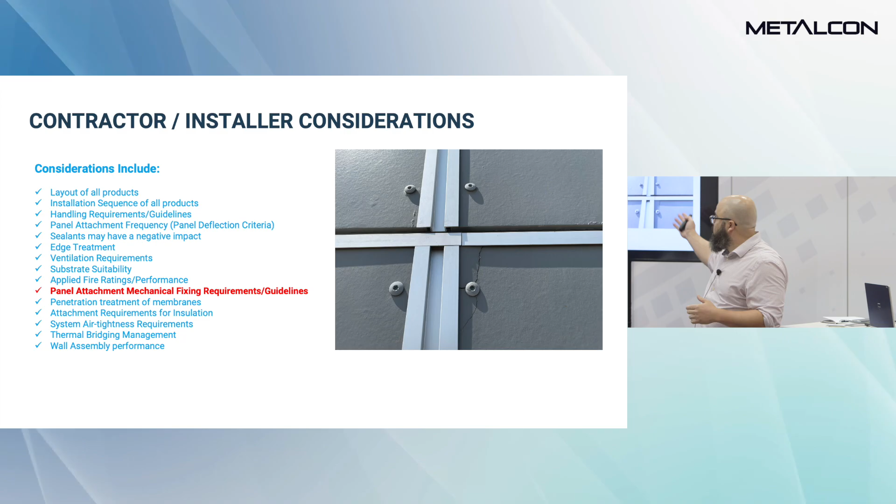It could easily be solved through strategic breaks in that metal in different areas, but if you don't realize that the different parts of your wall system have to work together, you're doing things like this, and you're coming up with cracked corners and so on. Same thing with installation - you have to do a lot of things in the field that aren't on the drawings, so you have to know, as I'm making a decision, does this work with this? How do these things go together?

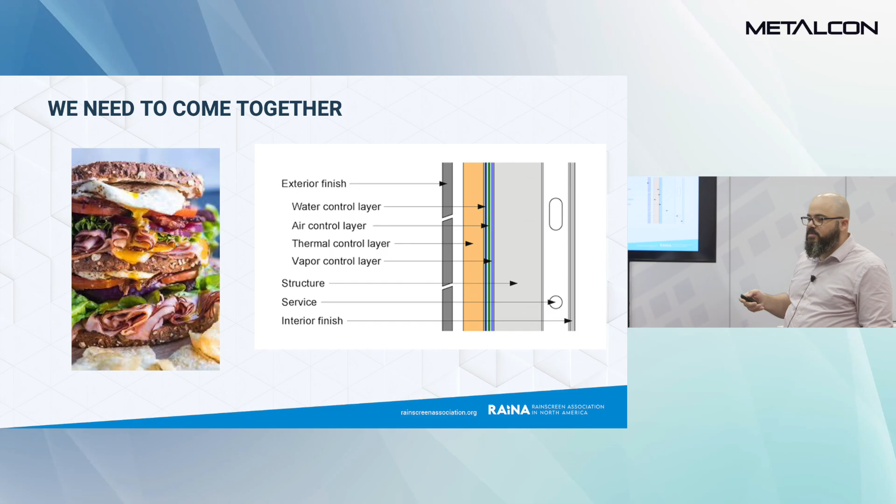So all of that brings me to my last pitch for the Rainscreen Association. The chairperson for the Rainscreen Association put this slide together. To me, this is a particularly ugly sandwich, but it shows all of these parts of this sandwich have to work together to make a delicious sandwich. It's the same thing with the Rainscreen. So this is why we need the Rainscreen Association.

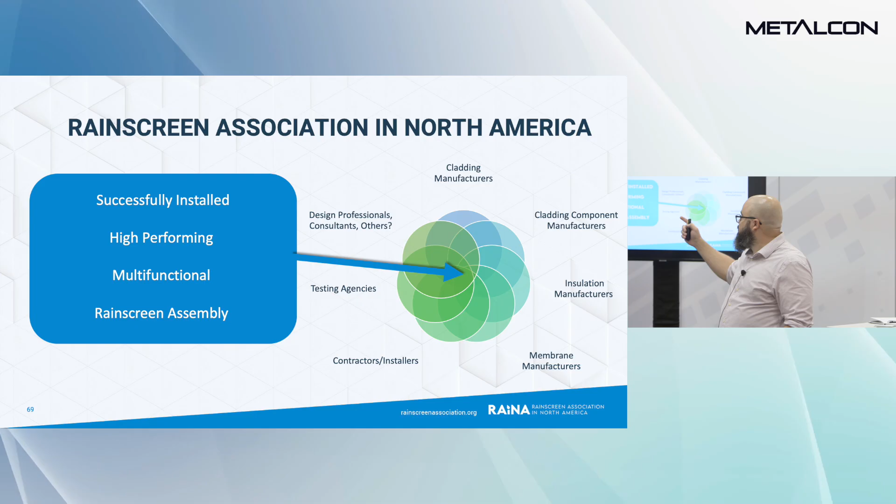We have all of these components, all of these stakeholders working on Rainscreen together, but they're often not working together. And at the center of all of this is where we have successfully installed high-performance, multifunctional Rainscreen assemblies. So naturally, after 10 years of hitting our head against the wall trying to organize, in 2020, we formed the Rainscreen Association in North America.

And that's where we are bringing together the manufacturers, the designers, the engineers, contractors, et cetera, and coming up with standards together rather than separately like we've been doing for decades. We have about 100 member companies in the association that are working literally every week on different things. Each of the member companies has representatives on different committees - I'll show you that in a second. But the idea is to integrate the expertise from around the industry, have building science-based performance criteria. We haven't created any standards yet - we're only a couple years old - but we've been working towards that from day one.

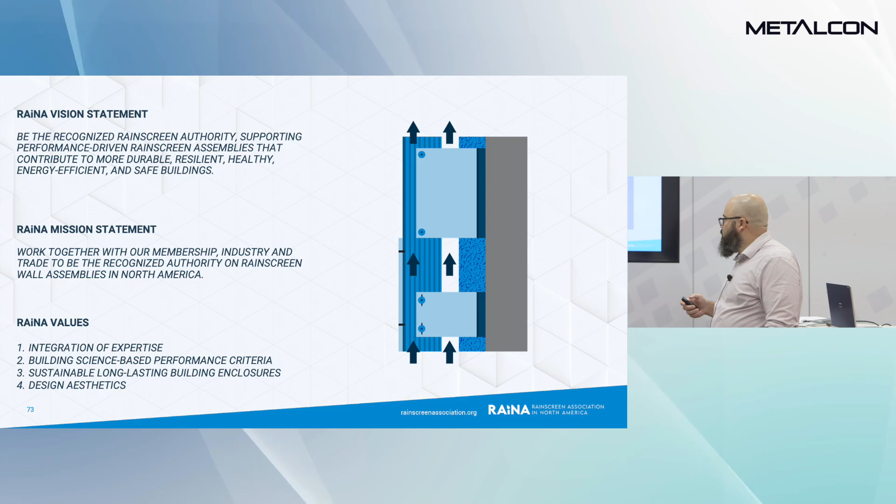And then focus on sustainable, long-lasting building enclosures. Again, this idea about Rainscreens is about bringing components together that were working separately. When we started the organization, there was this idea that we don't want to reinvent the wheel. We don't want to start working on metal panel standards - MCA has been doing an awesome job of that for decades. What we want to do is take whatever's been done in the industry and incorporate that into this integrated mindset.

Just want to see where we are, okay? 12 o'clock. So we have working relationships with the Air Barrier Association, with MCA, with FGIA, with AIA. We share information, they share information back. We want to make sure that if there's expertise in an area, like air barriers and water barriers, we're taking people from the Air Barrier Association and incorporating them into the conversation so we can use what they're putting out, and they can incorporate what we're putting together.

And this is all done through 7 working committees. This is the structure of the organization - on the bottom you see the 7 working committees. Our 100-member companies can have representatives on whatever committees they want, as voting members or just observers, participating in conversations about the terms we just went over. We're making code changes that help start laying the path for integrating these different components into an assembly, having that mindset in the code, which is not in the code right now.

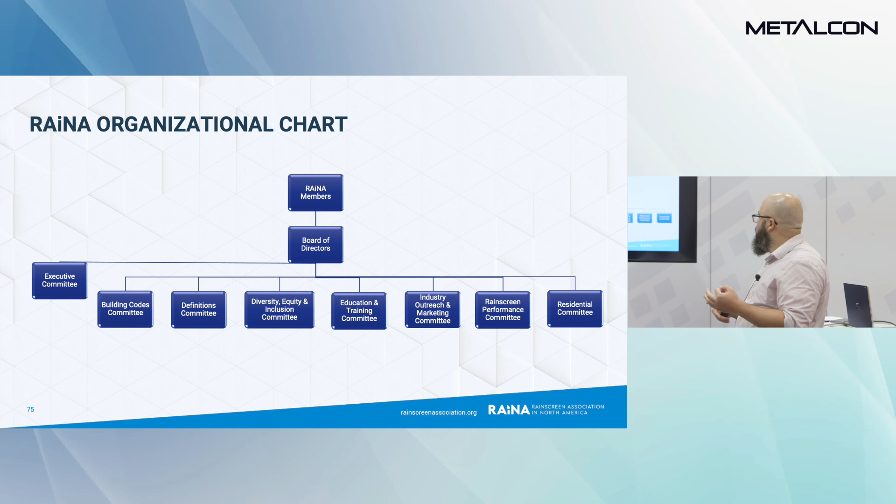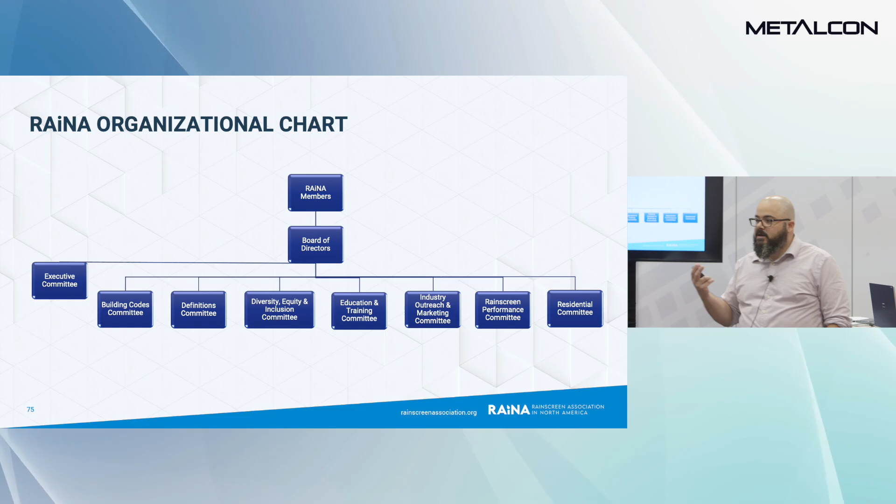Education and training - obviously training the industry about these things. And then I talked a little bit about our residential committee before. What they're doing is taking all the work that's being done, mostly - I have to say, bias on the commercial side - and making sure the residential industry for Rainscreens has some focus. So they take resources from the performance committee, from the codes. We got Rainscreen into the IBC and the IRC last year, so in 2024 you'll see that, and they're making sure residential is being focused on, because residential is a huge part of Rainscreen. And then we have our newly formed Diversity, Equity, Inclusion Committee, which is both internally and externally focused, and in my opinion, a sorely needed view in our industry.